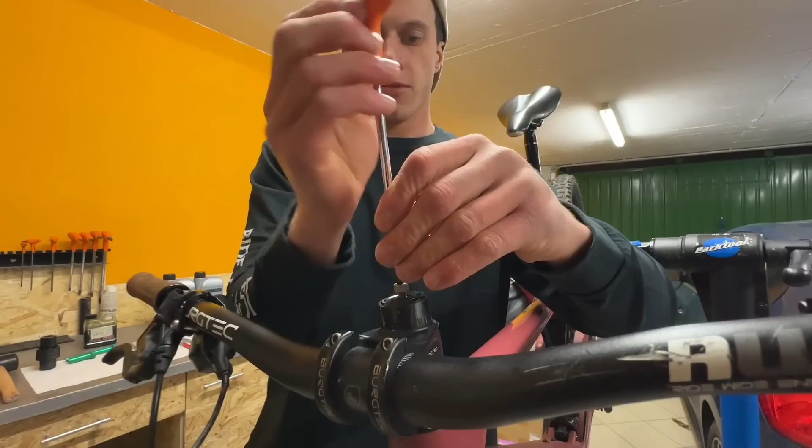We're also gonna do a headset service while we're at it. Oh God, this fork is a disaster. Guys, don't let your fork do this.

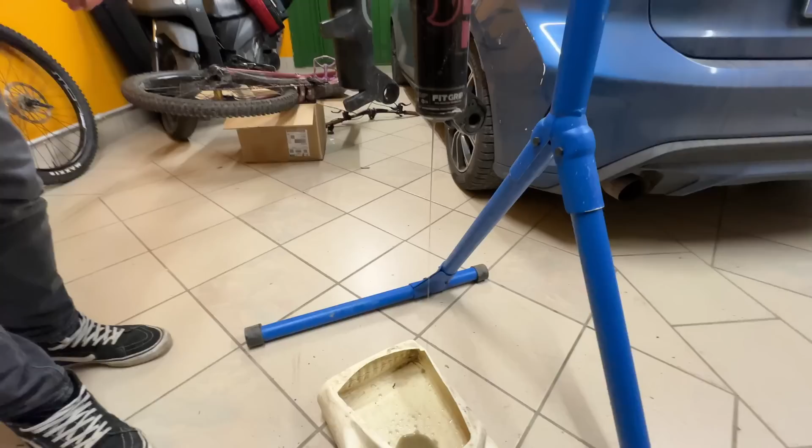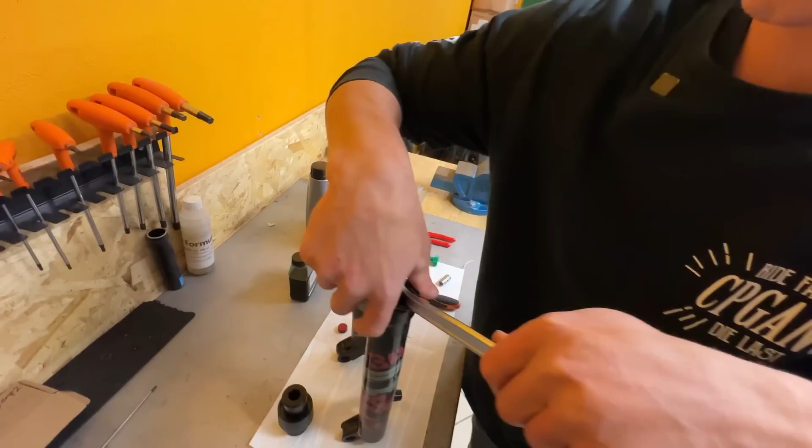This fork is well past due its service time. When you're at this point, you just want to give a really good wipe. Remove the dust seal, an open end wrench, 19 mil, works totally fine. So you just pry from the inside, and there's one, and the foam ring with a foam ring.

So now it's just boring, a lot of cleaning, really boring, so we'll just skip this part.

Once we have our lowers fully cleaned, deeply cleaned inside especially, I'm just gonna pour oil in a container, and we're going to dip the new foam rings, let it soak. I know this is like not by rules and by all the guides and whatever.

I like to put my foam rings first and then my dust seals. That's what I've been doing for 10 plus years that I've been servicing forks, and I never had an issue. Some people might say the opposite, but honestly, this is my level of concern.

So then we'll take our seal driver, and that is gonna guide our new seal into its location. This fork seal driver actually bottoms out on the fork lower itself, so there's no need to worry about driving the seal too far into the lower, which then might cause the foam rings to pinch and then destroy itself.

There you go, couple smacks, just like that, easy done. All right, once we're done, we'll just take our dust seal grease, coat them very well inside, and ready to go back on the fork.

Remove the cap. It did happen to me that I forgot to release all the air pressure from the air spring. I went ahead and removed the snap ring that sits underneath the stanchion. I think it went Mach 5 inside the shop and actually smacked into a drawer and dented it. That was actually funny, luckily it wasn't onto my face.

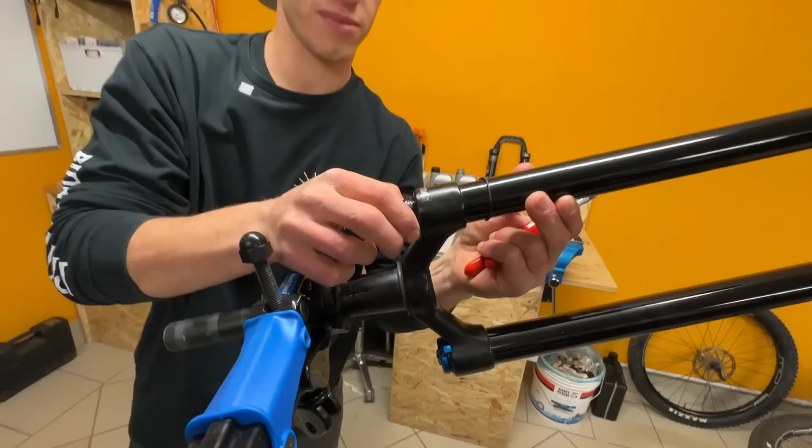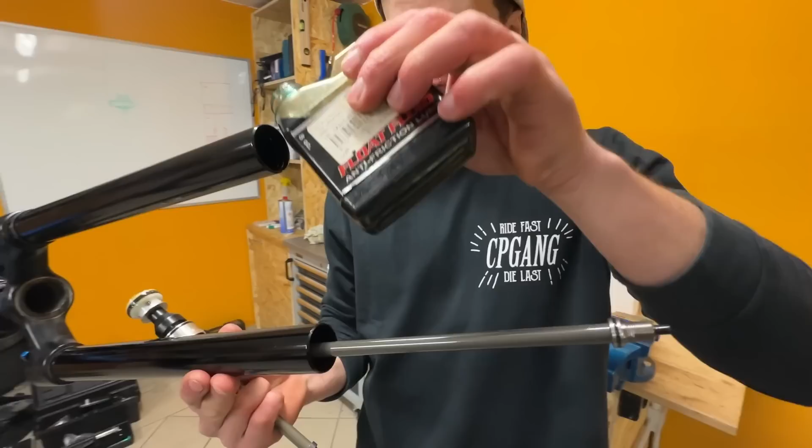Yeah, it's clean. Air spring is a really easy service. Coat lightly the seal. With our freshly coated piston, I just like to dump a couple drops of float fluid, not much. Sink the piston in, wait until it equalizes, send the head seal in, and then put the snap ring back in, and everything will click into place, just like that.

Once we're done with the air spring, we'll switch to the damper part. This is a Fox 34 Grip, so it's just a simple damper, regular compression and rebound setup. Nothing extremely fancy, but it works really well.

This thing was loose, was loose as. Honestly, it doesn't even surprise me, knowing the guy that uses this bike.

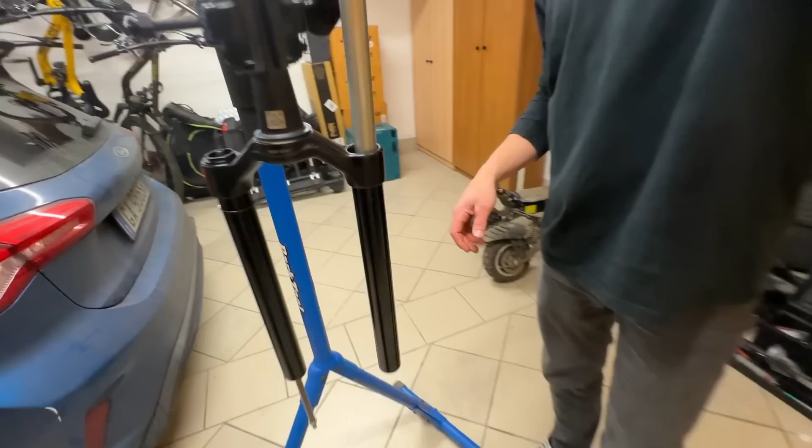This is the whole damper tube, so the damper is the most important part of the fork. This will control your rebound speed, your compression speed. Higher end versions will also control dual compression and dual rebound, so high and low speed compression and high and low speed rebound. Some others will do a lockout function as well as a low speed compression function. There's so many variables, many different brands, different types of cartridges and dampers.

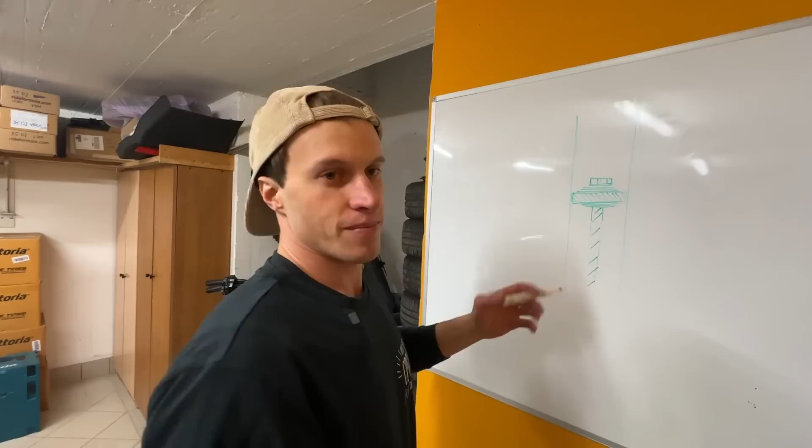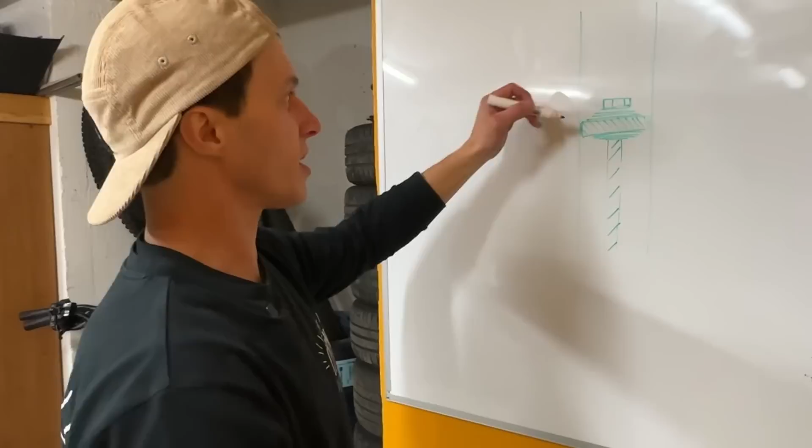I have just drawn on this whiteboard a really rough schematic on how a damper works. Pardon my bad drawing, but bear with me. We have our damper tube, our piston here, our damper shaft, and the shim stacks. There's a nut clamping together all the shims, piston, and the other shims. In this case, we have a piston that will control rebound and compression as well. This is called static damping.

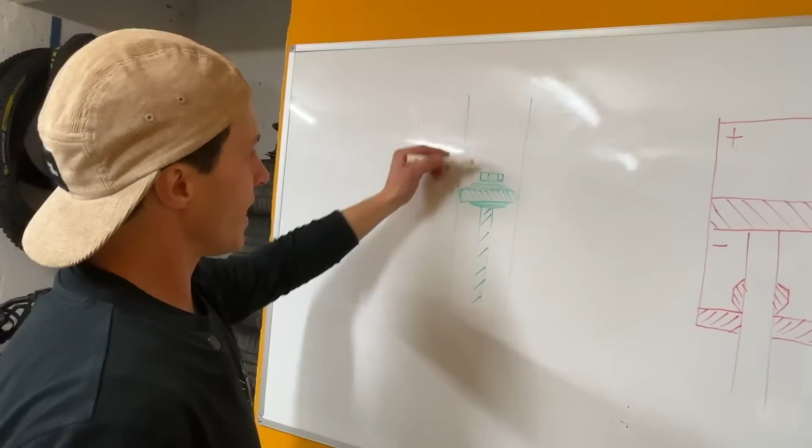So, for example, we have our damper tube filled with oil. As the piston travels up, the oil will go from this section down onto the piston. The piston will have some tuned holes in it, and those holes are plugged by the shims.

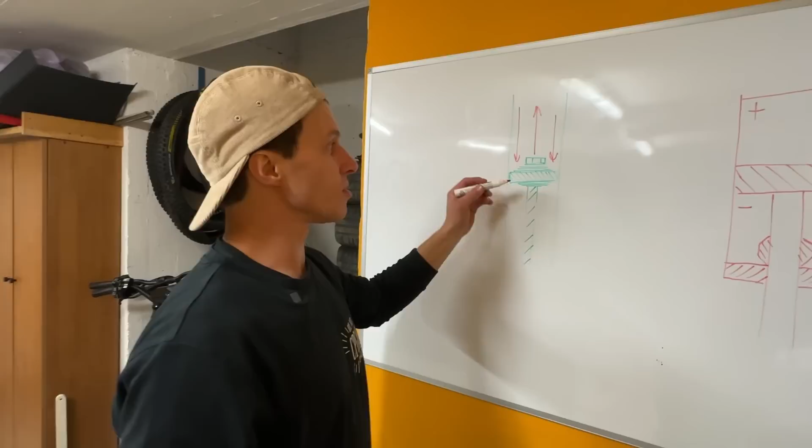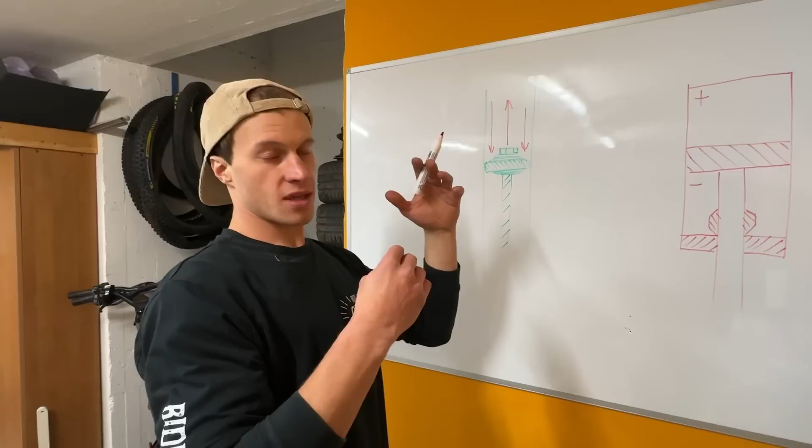The shims will flex out with the force of the oil. The amount of flex and how they flex dictate the amount of speed that the piston will travel up or down in the case of a rebound.

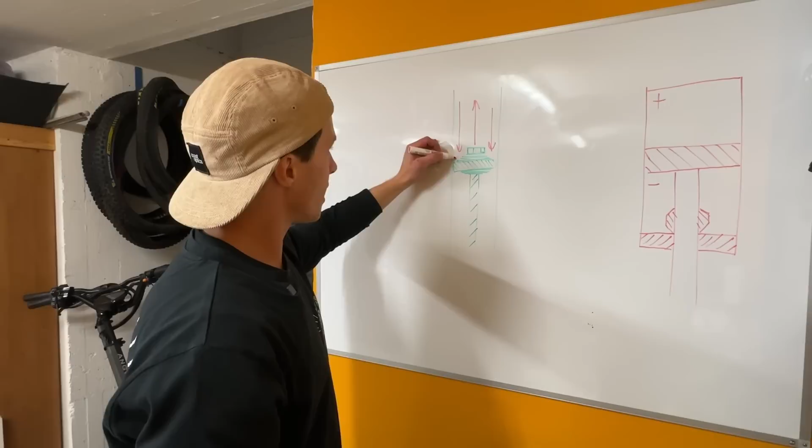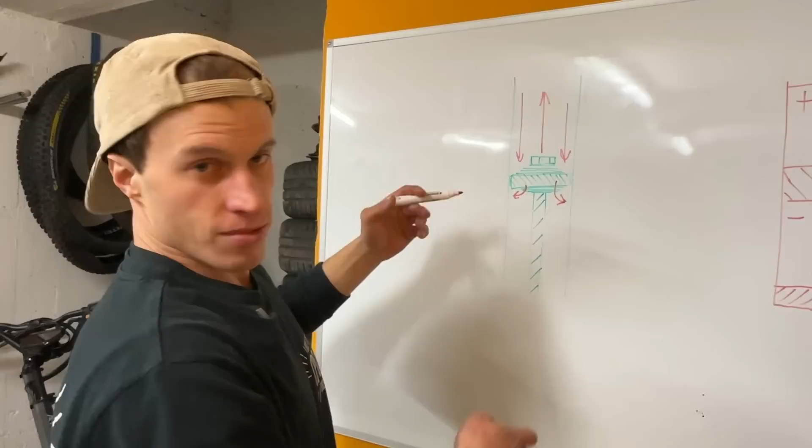So in this case, the piston is traveling up under compression, oil is flowing down inside the holes and will come out from this side and down onto the negative side of the piston. Same applies for rebound, as the piston will travel out and down, the oil will flow in the opposite direction.

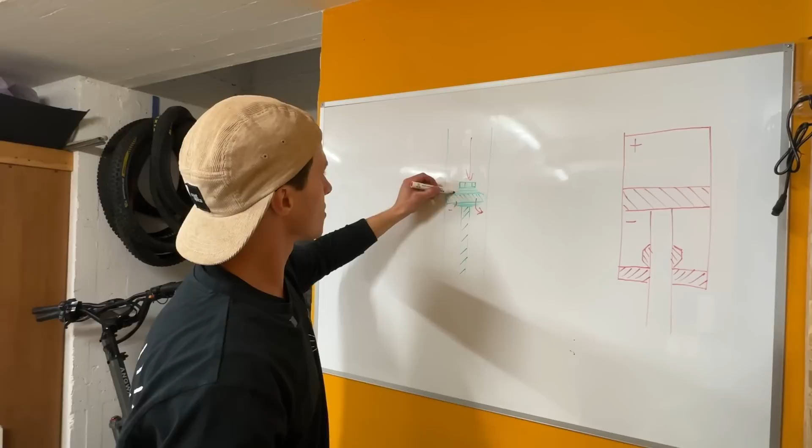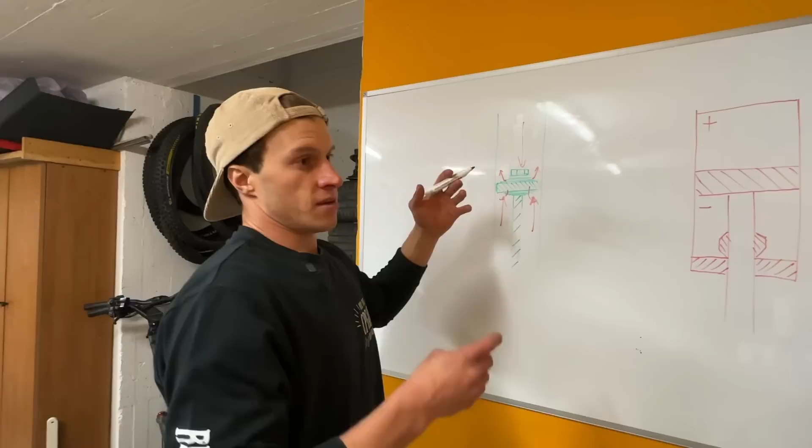It will flow out of this, in, out, in. And those holes are one way only. One way will be plugged for compression, and on the opposite side will be plugged for rebound. That's how a damper works. But we're just gonna stop here for now, this is just some of the basics.

Back onto our damper, the vice jaws that I have are specifically made for Fox grip dampers. In this case, the piston shaft only handles the rebound side of things, and the compression side is done by a spring-loaded internal floating piston. You saw me in the last video replacing the internal floating piston on the RockShox Reverb seat post of this bike - the IFP does the same exact thing.

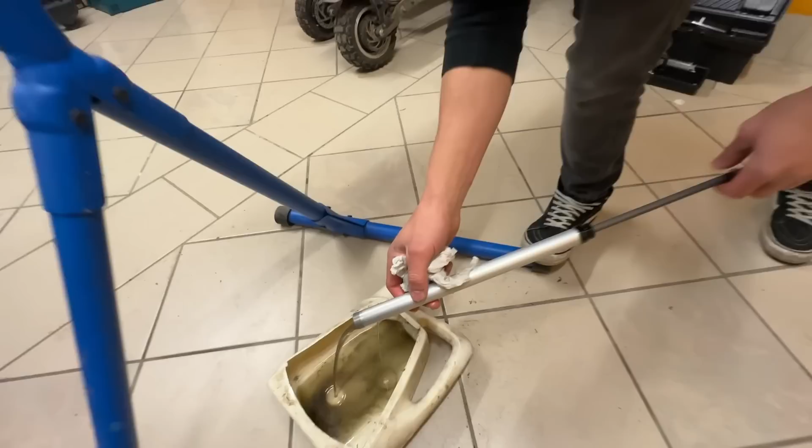Yeah, the oil is filthy, but on the RockShox Reverb the IFP is air loaded, while here it's spring loaded. There's no air on this side holding the IFP down. This takes the oil displaced by the piston as the damper travels up under compression. Dump out the oil, now we can remove it.

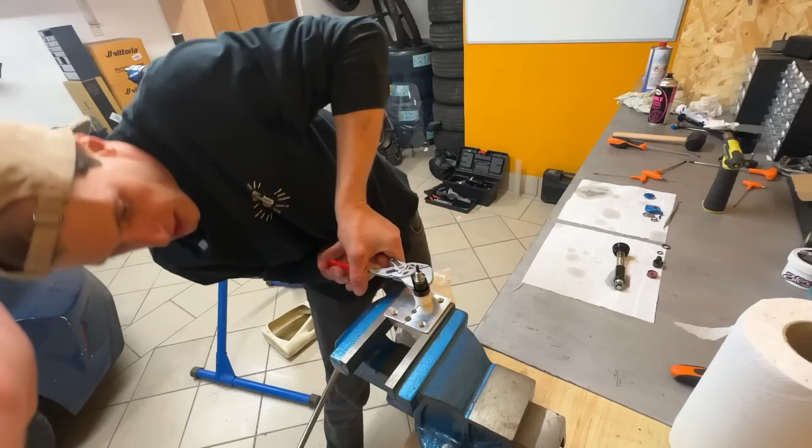Okay, the Loctite is a little bit too strong on this, so we just have to heat it up so it loosens itself, and then we're gonna be able to remove the seal head. There we go. And that's the rebound piston.

It is the morning after now. My camera battery died last night, so unfortunately we had to quit. It was actually pretty late at night, so it left me at removing the piston from the damper tube.

Once we inspected that everything is all right, we're just gonna go ahead and reinstall the whole damper together, fill it with new fluid, and bleed it.

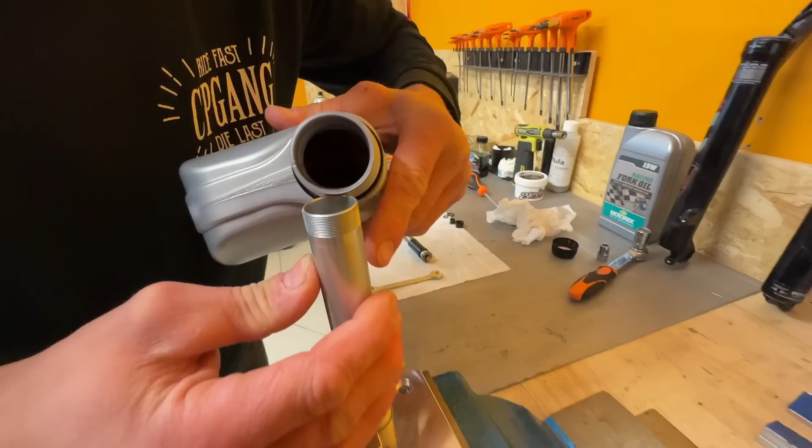Now we filled the damper around. The grip damper is super easy to service. Once you fill it with a little bit of oil, you start cycling the piston to remove any air bubbles from the bottom, and you fill it up to the whole line.

Grab your compression assembly, and that's the moment where you want to grab a nice amount of rag and plug the overfill hole - a lot of oil is gonna shoot out from that. And there we go, pushing some oil out of the damper because the damper will be overfilled.

Once this step is done, tighten it, and we're gonna be putting the lowers back in. Make sure it functions as it should.

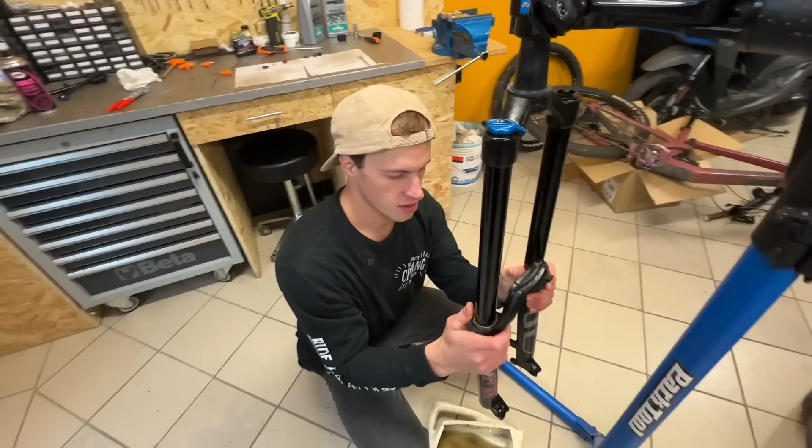It's somewhat of a crucial part because you don't want to pinch the foam rings or the dust seals. So carefully with your finger, just drive the seals into the stanchions and make sure that it glides smoothly.

Oh, it's a little stiff because it's really cold in here, so all the grease and oil is like honey - it doesn't glide very well.

Flip the fork upside down to fill the oil into the lower legs. We're gonna need to fill thicker oil onto the air spring side, and then the same oil that we used for the damper onto the damper side. This is the air spring side, and that's the damper side.

We have the rebound knob sticking out. Don't forget to put new crush washers, they're usually included in the kit, in your dust seal kit. These are very low torque, usually it's like 4 or 5 Newton meters of clamping torque.

That hurts. Oh, put the fork upside down - well, I mean the right side up.

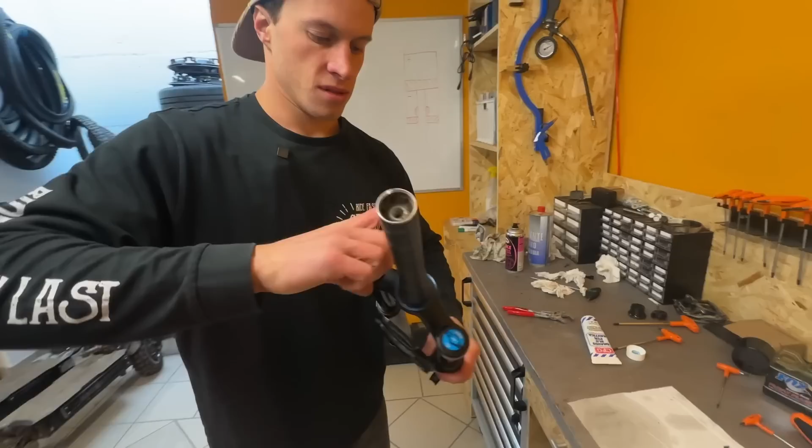Currently I'm prepping the fork to send it back onto the bike. Just lightly grease the headset crown race. So let's grab this thing - this poor bike's bearings already cleaned and greased - and send the fork back in.

And my mate Diego just showed up. Hey guys, stay here. Yeah, we've been hanging here all night.

And then put the stem back in and clamp everything down. Put the hose guide back in.